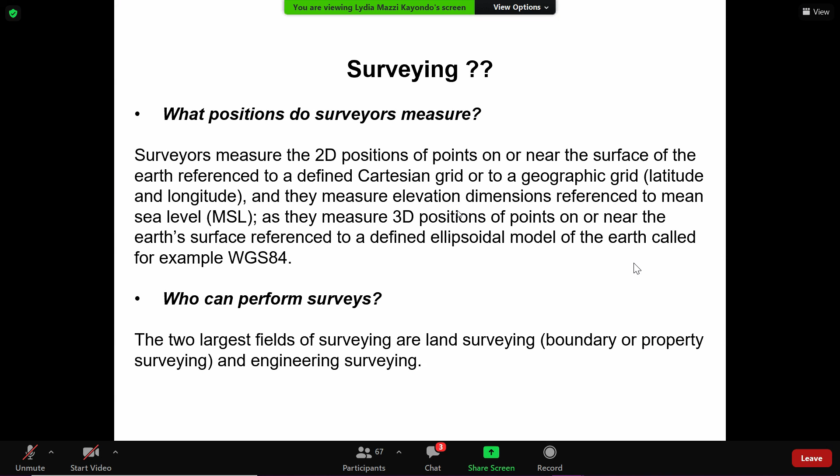Okay. So this is a basic definition of surveying. Of course, I will not ask you to define surveying, but this is just so you know where we are coming from, so when we get into the core of the engineering bit, we can easily blend.

Surveying will help us to determine position of points above or beneath the surface of the earth. Surveying will help us to find position of points on the surface of the earth, above the surface of the earth, and also beneath the surface of the earth. And examples which we have already discussed include determining location, position, that's XY, determining elevation or height or reduced level, that is the Z, mapping location of utilities.

For example, Umeme will have positions of transmission poles and the lines so they know which goes where. National Water will have positions of their pipes, of their ducts. So we have electrical ducts, we have water, we have mechanical. For example, the cameras that have been installed, they can easily be located. So even when you are going to construct a road, you should already have this information, so you are not cutting pipes here and there. It makes the process much easier.

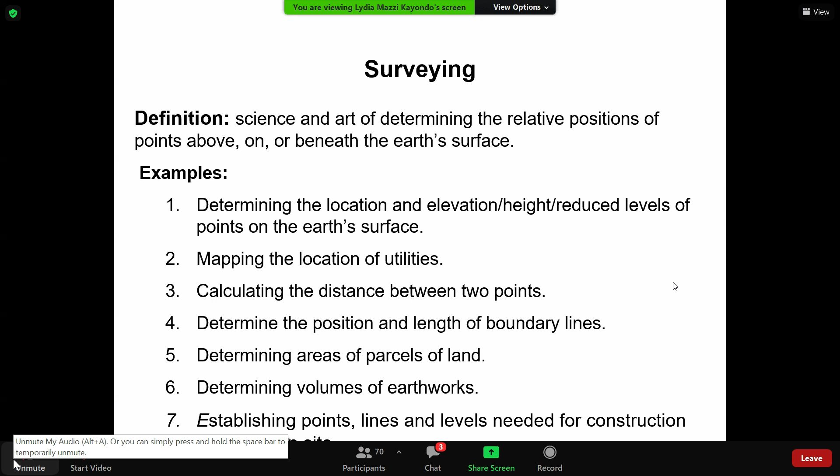Okay. So what are the categories of surveying? I do not know if we all know what the shape of the earth looks like. Sonia, what is the shape of the earth? It's spherical. It is spherical. Spherical means a sphere.

So we can go with what Sonia has said, that the earth is spherical, and whether it is purely spherical or not, we shall discuss later on in the course. But we now decide to assume that the earth is actually spherical, which is what we have learned anyway from the globe in geography.

So it means if I have one point at the North Pole and I have another point at the South Pole, the line joining the 2 points is clearly not a flat line or a horizontal line from Sonia's description of the earth. And this brings in the difference between plane surveying and geodetic surveying. If I am measuring a distance 100 meters apart, we can comfortably say it is a flat surface, and it passes without having to apply any corrections.

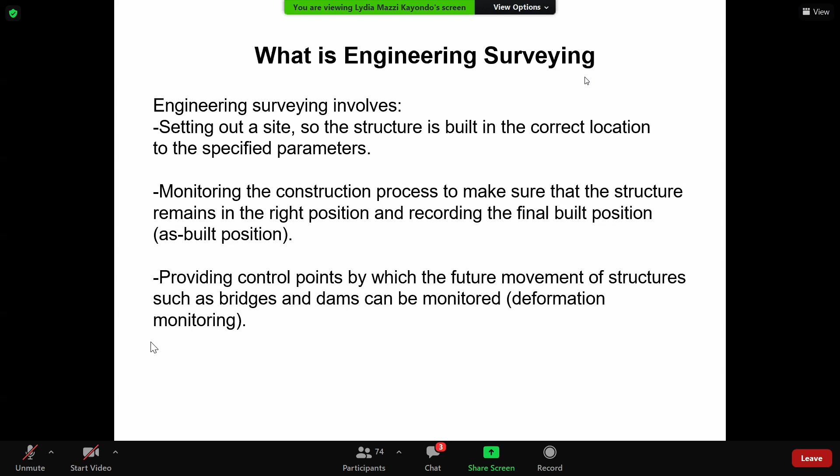You have seen buildings collapse. You have entered into a building and you see elements of failure. There's a column which is broken horizontally, and of course, engineers are experts, so that bit of stress and strain, you should be able to manage very well. So you know when there is danger, so you can alarm, and you know when the situation can be contained. So that is engineering surveying. And if there is no question, then we will look at other types of surveying.

This is simply so you know, like we said, on a construction project, you will have an engineer, and the engineer can be a highway engineer, they can be a hydrologist. You will have a geologist, the soil engineer, an expert in the soil who will test the materials and whatever it is. You will have a surveyor. If it's a building, you'll have mechanical and electrical. On all projects, you have environmental impact assessment. So you have a series of experts on every project, and therefore you should know who does what.

Also, it creates a clear line of communication. So if I want data for drainage, I will ask the hydrologist. If it's a building and I want to know the reduced levels maybe of the ducts for electrical and mechanical, then I know who to ask. So you understand the nature of the project, which parties are there and how to work with them. In engineering surveying, you cannot work independently. Somebody's input helps things to move in several other ways.

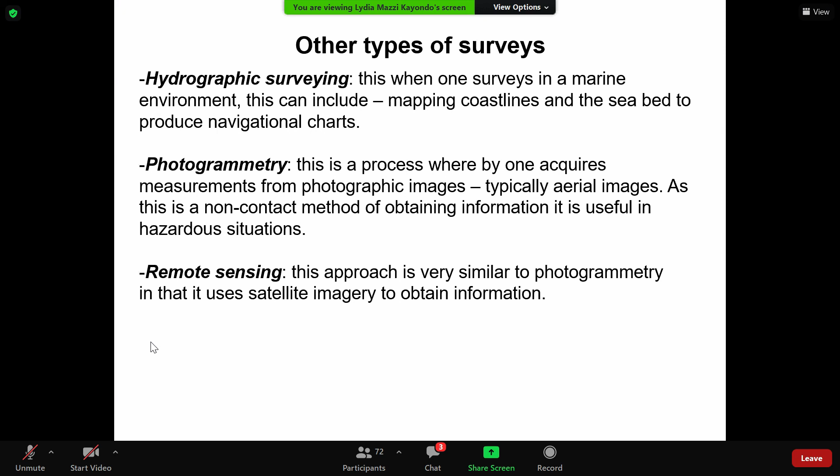And then we have GIS. This is simply a way of merging spatial data. Spatial data is coordinates. So it is a way of merging coordinates to the non-spatial data. We have, for example, talked about if we are building a road, we need to compensate the owners of the parcels that are affected. So the surveyor will capture the coordinates of these parcels so we know the extents and the coverage. And then these plots have owners. So we have to know who is the owner by name. Where does the owner live? Is the owner married or not?

Because when you're doing compensation, you don't want to pay the man and later on the woman says the property is mine and therefore I need compensation. You need to know what kind of proof of ownership they have. You may compensate somebody with an agreement and then somebody with a title comes up later. And this happens a lot in the central part because of this tenant landlord kind of situation. The people on the ground are not the landlords. They have the agreements, but they do not have the titles. So all this information will be attached to this map or to these coordinates. So I know plot A is affected. We need to buy off maybe 10 decimals.

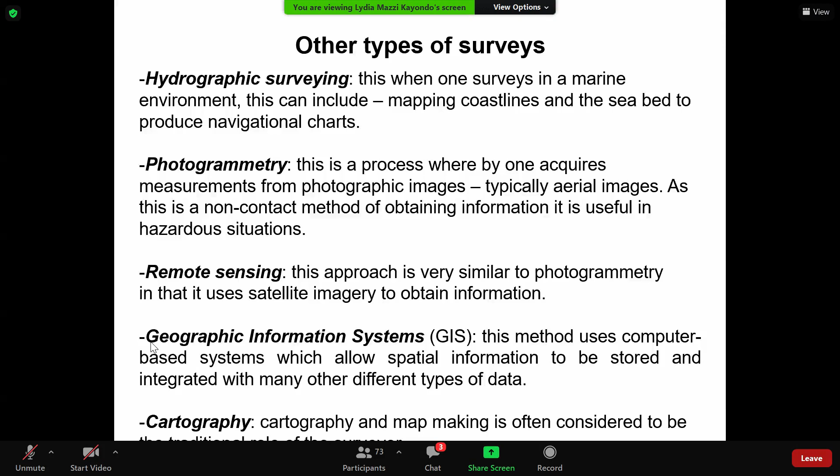So those are the other types of surveying that we may encounter along the way. For example, in engineering surveying, we have topo, we have cadastral, we have hydrographic. We may actually also do photogrammetry and remote sensing if we use Google Earth to do preliminary design. And then we definitely have the GIS because everybody has to manage their information somehow using different software.

Then we have route surveys, which is topographic survey of a corridor. So route survey is under topographic surveying. I could do topographic surveying of a site for construction of a school, a mall, whatever it is. So if I am surveying a corridor for a route, it can be a railway, it can be a pipeline. We talked about Umeme, transmission lines. All that is categorized under route surveying. And those are, not actually all, those are some of the types of surveying.

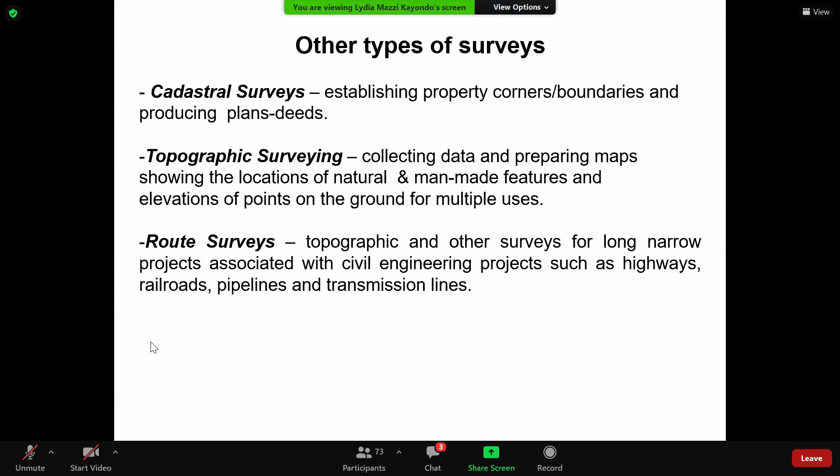So if there is no question, then we can look at the different equipment that we use to facilitate this work. Okay, no question. We have a theodolite. I see Ampumuza's hand up. You can put your question through.

Hello, yes, I can hear you. As we are talking about the activities encountered in engineering surveying, there is some term that you use, control points, and we don't understand that. Yes, which term was that? Control point. Okay, a control point.

Let me stop sharing and see if I can get a photo of a control point here. So, okay, I go back here. Screen share again. Share. Can we all view the screen? Yes.

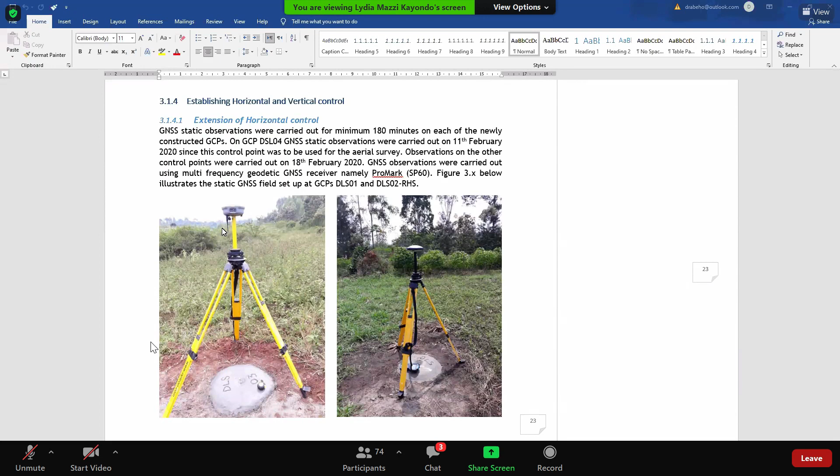If it is leveling, I will carry my leveling rod or staff onto that point, onto the nail, and take my measurements. And then it can also be a point that has a GPS like this, full time, it is recording and sending information to a computer somewhere in an office, the control center, and then we are able to access that information.

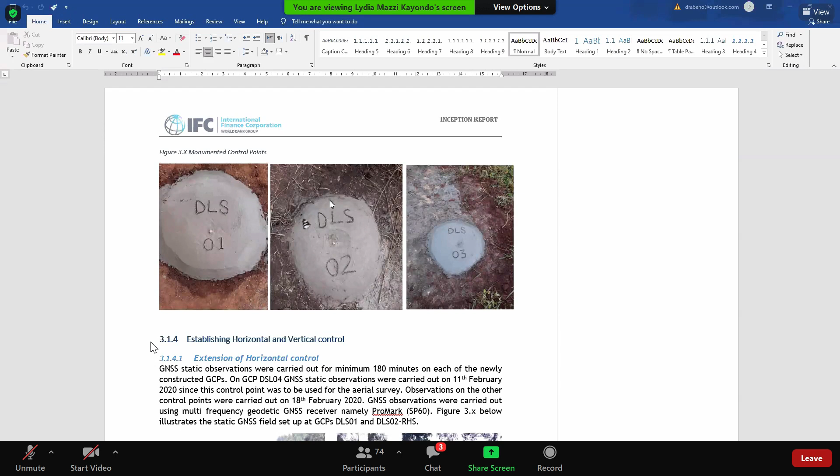So in very simple words, a control point is a point whose coordinates we know, and it is a basis of controlling our surveying or topographic surveying or data collection. That is, I place my machine on a known point, or I place my machine somewhere and read onto a known point, so I am able to attach coordinates to my newly collected data. Is that clear? I hope that is clear.

I will stop sharing. Thank you. Okay, then there is a hand from Cassidia Henry. Cassidia Henry, can you please ask?

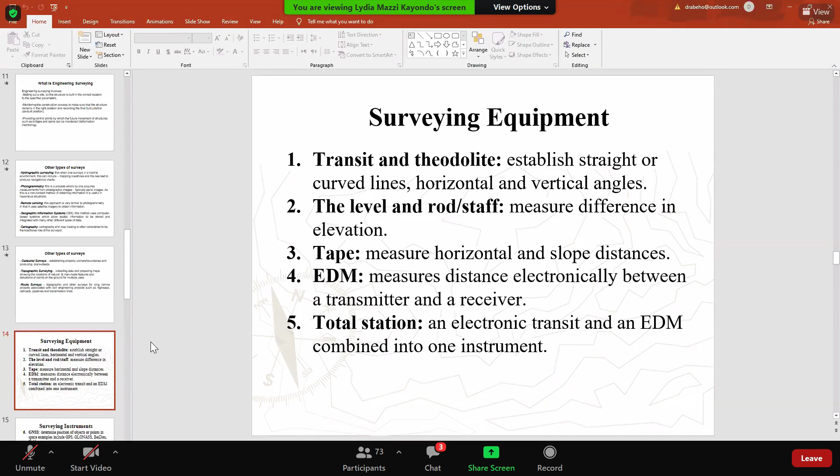Yes, I have a question. You are saying that I have to make sure that the report which I'm endorsing is true and correct, and yet I'm receiving this data from a surveyor who did this survey when I'm not even on the ground. So to what extent am I really responsible?

Yes, Henry. If I am the surveyor and Henry is an engineer on the project, I will prepare a survey report, which I will fully endorse before I submit. So I have committed that I have given you true and correct data. You have received it as an engineer. You are not going to endorse my report and say what they have given me is true, but you are going to utilize my information to prepare your design. And before you submit your design for further processes, you shall also commit to having prepared the correct design.

So I have my survey report signed off. You have your design report plus all the design detail, the drawings, the plan and profile drawings. And then you shall also sign off and submit it to the next steps. If mistakes happen in the design not as a result of poor data, you shall be responsible. If there is a mess in the design as a result of mistakes in my topo data, then it shall be my responsibility. Is that clear? Okay, thank you.

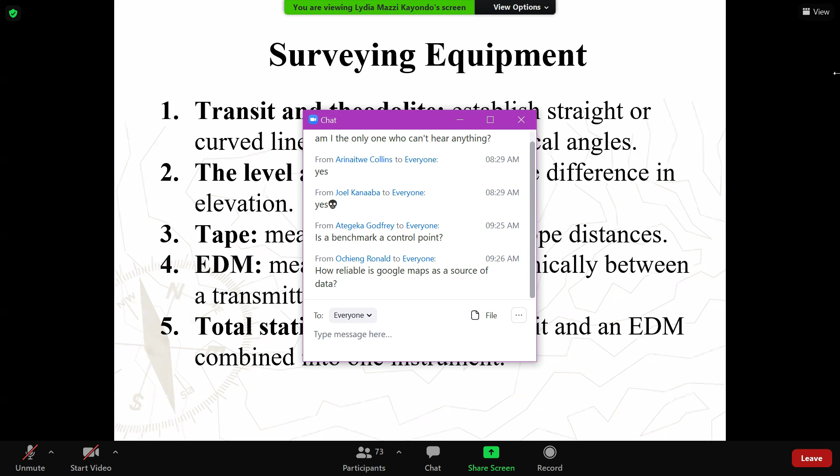So now we talk about equipment used to take measurements in surveying that we also use on construction sites. There's a transit or theodolite. I don't know if anybody has seen what a theodolite looks like. A theodolite is used to measure angles. It can be in the horizontal direction. It can be in the vertical direction. Then we have a level, which by now, as an engineer, you should have already seen or used, or at least you should know what it is. And we use this to measure height or elevation or reduced level.

Then we have a tape to measure distance. Then we have what we refer to as EDM, electronic distance measurement devices. And they are of several sorts. You have some embedded on machines. You can have a small equipment that sends a laser and back. But the whole difference between tape and EDM is that EDM is digital. You read off the screen, and a tape is manual. You stretch and read.

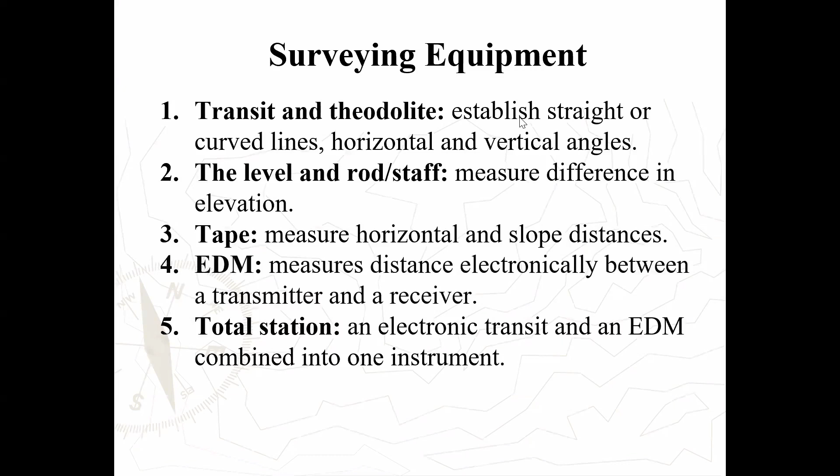And then we have GNSS, which we refer to as GPS most of the time. GPS is Global Positioning System. GNSS is Global Navigation Satellite System. So GNSS is the broader picture. All satellite measurement systems are embedded into that. And GPS is the GNSS of America.

GLONASS is the GNSS of Russia. Beidou is the GNSS of China. Galileo is the GNSS of Europe. So maybe we shall have one for Uganda, hopefully soon. So the general picture is GNSS, and then these smaller ones are dependent on who innovated, who mans it. So you'll find GPS is completely in the hands of the Americans. However, we can get data free of charge. If they levy a cost on it, then that will also happen.

Then we have the 3D laser scanner. This is also a technology that is now growing very fast, especially in works where we have to work with volumes of earthworks to compute volume, stockpiles. If you have a heap of stone base, a heap of whatever material it is, you scan. And what we have out of this laser scanning data is simply X, Y, Z, but the densification of the data is much more than the traditional methods.

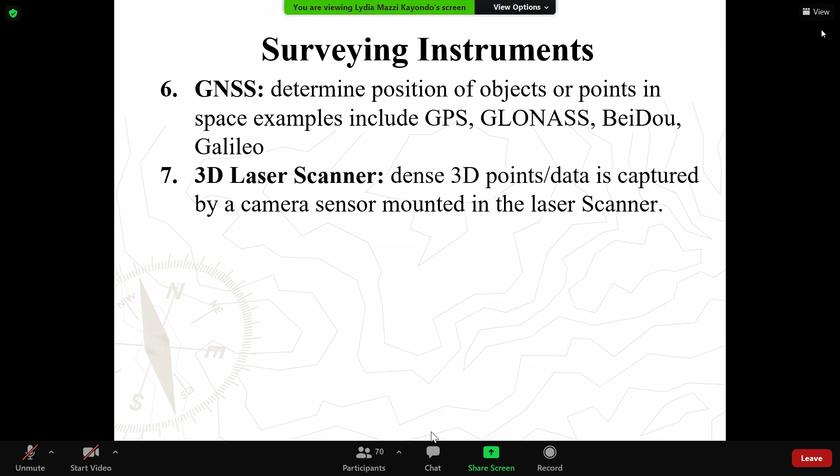So it sweeps, it has a camera that takes a photograph. It also takes the X, Y, and Z. So you can generate a model out of this. If, for example, you want to scan an existing building, you can use a laser scanner. It will give you a proper 3D representation of the way it actually is. You can then measure off the sizes of the different components, the windows, the heights of the floors, and things like that.

Problem is it generates a lot of data. So you have to have a high-speed machine or computer to be able to utilize the information, and also the time to be able to decode your information.

So we have pictures there of some of the machines we have talked about. To the top left, we have a tape. It doesn't have to be a steel tape, some are fiber, and that is used to measure distance. Then you have a theodolite, bottom left. This is an electronic theodolite because you see it has a screen where you can read off your angles. If it were a theodolite that's not electronic, then you would not have that window. You simply look through the telescope and read the horizontal and vertical circles.

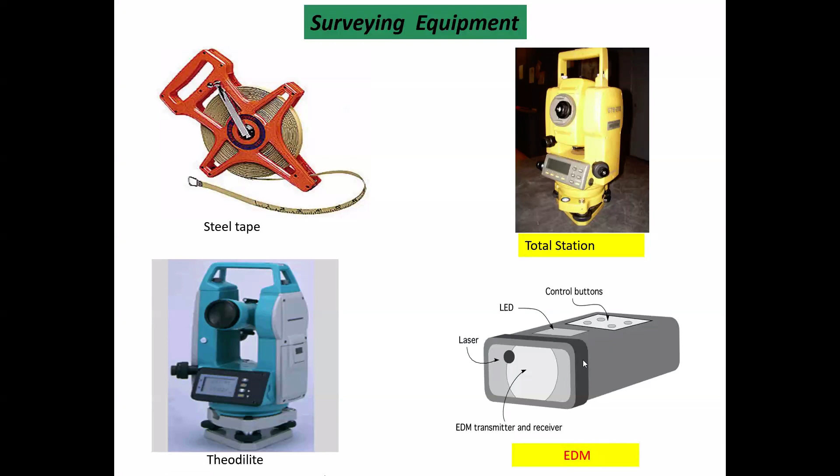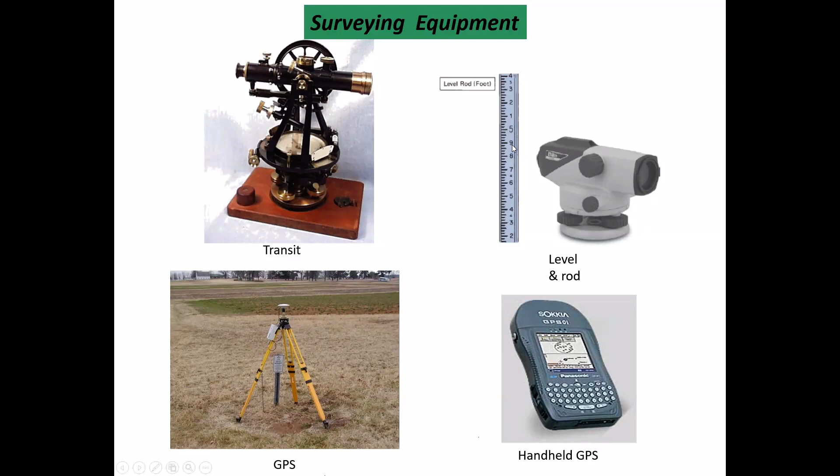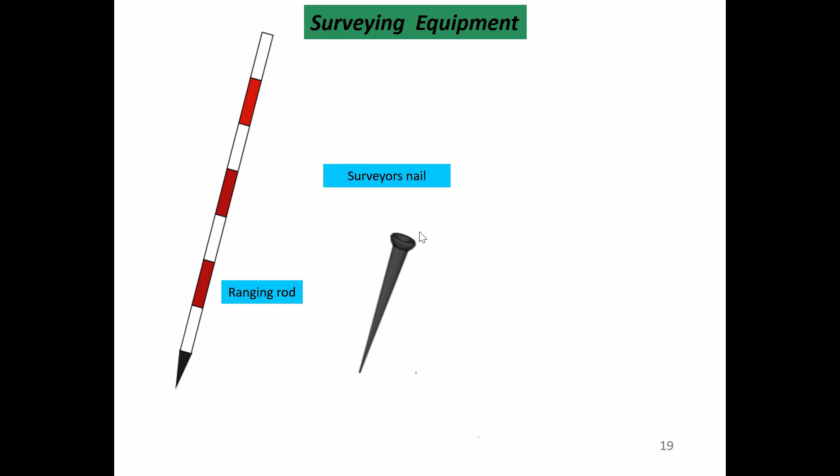And then we have a plumb bob. When you use a theodolite or a total station, even GPS, you may need this to center. The control points that I displayed, you recognize that it has an iron pin at the center of the concrete. So when you're setting up the machine, you set it directly above the nail.

Sorry for the interruption. I was talking about this plumb bob. When we set up a machine, we set it directly above that nail. So you hang this plumb bob, it has a string, you tie it under the tripod. I don't know if everybody knows what a tripod looks like, but it's that three-legged gadget where we set up the machine. It can be a level, it can be a total station, it can be a theodolite, it can be a GPS. So it has a hook just beneath.

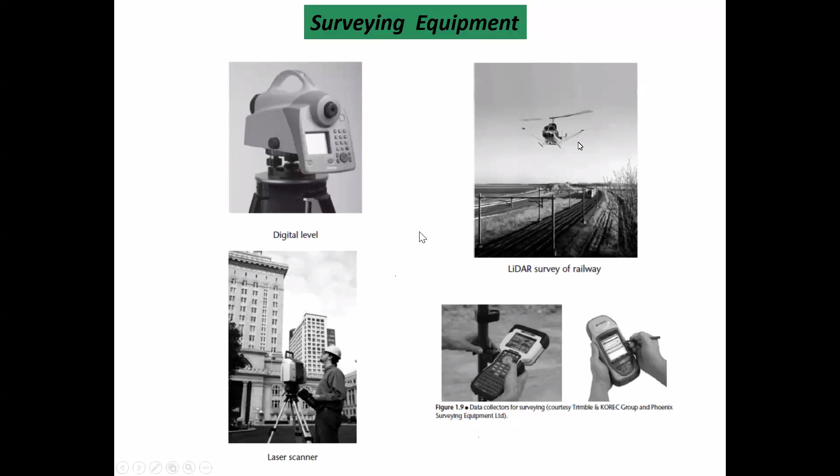So that is, I think, some of the equipment that I managed to put here. There are several others. Like I said, there's a drone UAV, which will do the same as a LiDAR survey, but now this is a manned aircraft. So you can try to read and find out the other equipment that you will actually use. And then there are some you already use as engineers.

We have used a vernier caliper before. I am sure you remember what a vernier caliper is, to monitor cracks on roads. If they are really small, you want to measure over time and see if it's expanding, if it's stable or otherwise. So it really depends on the cause of your measurement. It depends on the accuracy required. It depends generally on the terms of reference of your assignment, which will decide which machine to use.

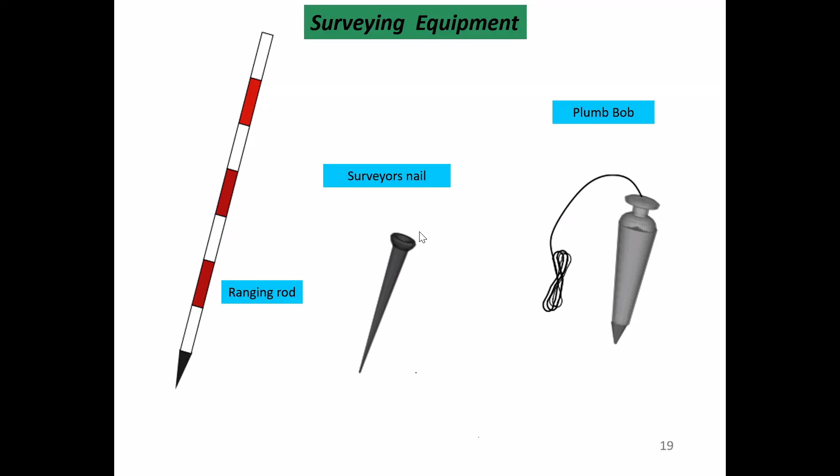If you're required 5mm accuracy, then you get a machine that will help you get that. If you require a meter, then you can even use the handheld GPS. And you can't use a tape and claim that you measured to sub-millimeter accuracy, because the smallest partition, I think, is 1 millimeter. So how accurate your data will be will also depend on what machine you have used and also the procedures you have taken and things like that.

So if that is okay, then we shall look at, which I think is almost the last 2 or 3 slides, how engineering surveys are conducted. And this we have talked about in the 1 or so hours that we have been discussing. So this is just to put things in order so we know what falls where.

Number 1, let's say you have a road project that you are required to work on. Visit the site. This will help you to do the necessary preparations. Maybe you thought you could use GPS, but it is a forest and you cannot work with the canopy. Then use a total station.

This helps you to prepare generally, but also to budget for your field work. Maybe when you submitted the financial proposal, you assumed that you will spend 100 million. When you do reconnaissance, you can tone it down to maybe 50 or to 200. So reconnaissance is a must for every task, however simple it appears.

Then we have field work and data collection. This we have also discussed in one way or another. Then we have computing and data processing. We will assume for our road project that the data collection is a topographic survey. Then we have submitted it to the design office. Design office has done the geometric design. They have prepared the maps or plans. We call them plan and profile drawings, where plan is the XY, and then profile is the vertical.

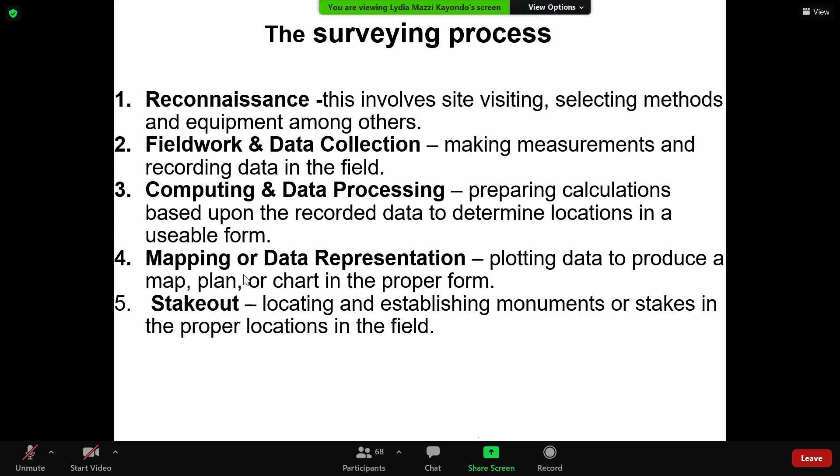So when we do geometric design, we do the horizontal alignment and vertical alignment. And all this is presented both in data format, but also in drawings. So an engineer or the design team will provide now the full design, normally in books, very well prepared. Now it is the task of a surveyor to be able to set out or stake out, and this is setting out the project physically on ground.

So I say the center line is here, road edge is here, road edge is here, the shoulder is here, the drainage is here, and things like that, both in XY, which is horizontal, and also in the height. So I will be able to know that there is a fill here of 1 meter, there is a cut here of ½ a meter. And then the detail of what material goes where, now that is for the geotechnical team. And so that's the surveying process majorly.

We have set out on ground, and then there is supervision. Well, staking out is part of supervision. When construction is happening, there is a contractor on site. There is also a consultant on site. The contractor does the work, the consultant does the supervision. So contractor will tell me, for example, I have set out the center line of the road from kilometer 0 to kilometer 10. If I am the consultant, I will then take my total station, go to site.

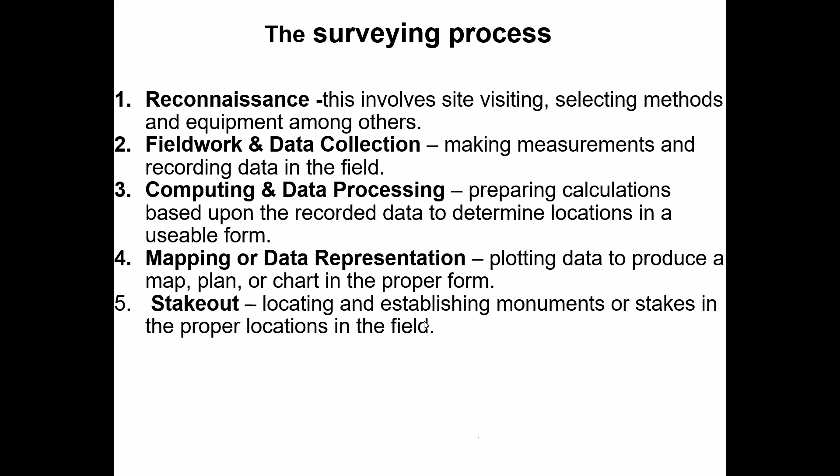So that is the process for surveying. Some of the processes may cut across, but this is specifically for engineering surveying because of the nature: we pick data, we give it to the design team, they give us the design, we set out, we monitor, we supervise, and then we do the as-built survey, and then finally we do the monitoring to ensure that whatever we have made is actually stable. Okay, so that is the surveying process.

This one talks about horizontal and vertical control. We shall, however, talk about this in detail. And when somebody asks what a control point is, we already said, we'll say it again, that how good your data is will also depend on how good your control points are. We, however, have national control points which have been established and they have passed the standards, and these we get from Ministry of Lands, Housing and Urban Development in Entebbe under the surveying department.

So if I am going to work in an area, I will rush to Entebbe and ask them for the control points that have been approved and have been published as national control, and I will look out for those to be able to tie onto the ones that I have established. But like I said, this we shall discuss later on in detail.

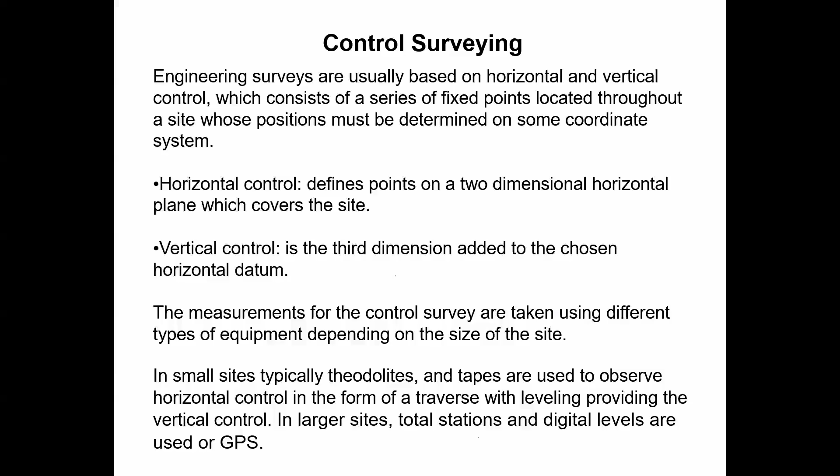A systematic error, let's take an example of a measuring tape. My measuring tape is supposed to run from 0, let's say, to 30 meters. But when the manufacturer was making this tape, instead of making it 30 meters, it is actually 28. But the labeling on it goes up to 30 meters. And this may be distributed across so that you get the 2 meter difference divided by 30 and know that in every meter you lose this much. But it can also be maybe 2 meters missing.

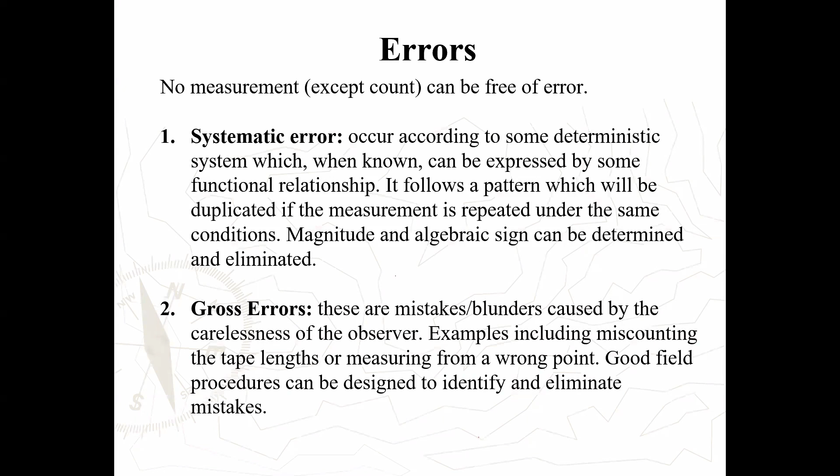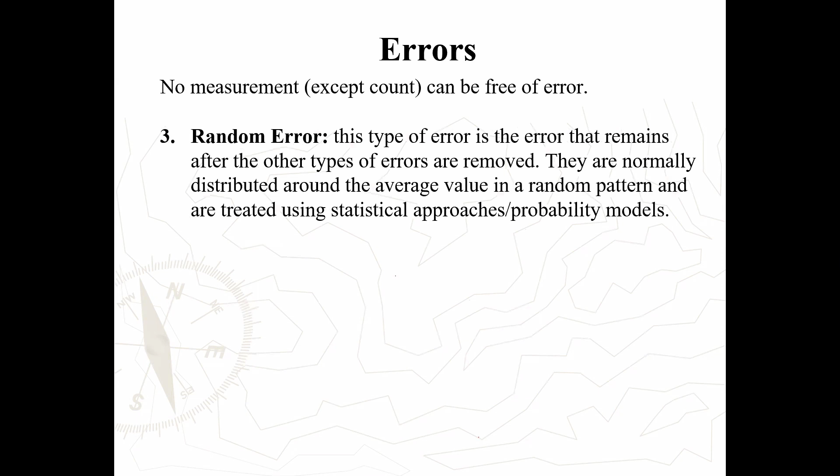And then we have random errors. You really cannot attach them to any cause. The beauty is that they have the normal distribution. I am sure we have done statistics since we are of mathematics background. So these random errors are treated using statistical approaches or probability models: standard deviation, several tests to give the confidence level and things like that. But to deal with them, first remove systematic errors. If there are no gross errors, then the rest you can solve using statistical methods.

This is the last slide, so people should not worry. This is just a few terms related to errors and accuracy.

Accuracy is the measure of the relationship between the measured value and the true value. Like we have said, in surveying we do not have true measurements. You may predict the true value, but the measured value will never be equal to the true value. The difference between the two is what is referred to as accuracy. So if your desire is to measure 10 meters and you have measured 11, your accuracy is completely poor, but also depending on what gadget you are using. If you're using a tape, it may be bearable. If you are using an EDM, then you definitely have to have sub-millimeter accuracy.

Then precision is a degree of closeness. If I have measured a distance 10 times, what is the relationship between the 10 measurements? If I have 1 meter, then 2 meters, then 1 meter, then 4 meters, there's definitely a problem. How do they relate? How close are they? If you have 10, the rest are 1 meter point something, then there's one that is 2, you can clearly tell that that is a gross error and you remove it. And that's why in surveying we are advised to take redundant measurements, even when we are doing angles, even when we are doing distance, so that when there is a problem, you have a starting point.

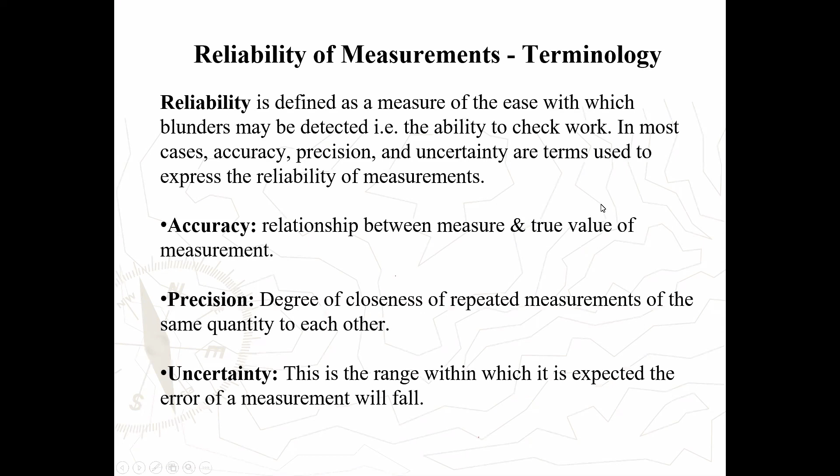And that is the end of our presentation. So if there are any questions, I will attend to them.